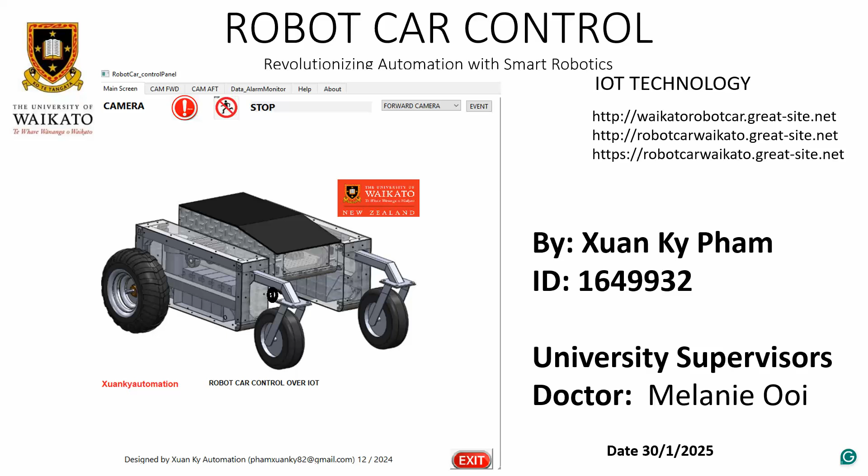Introduction: what is IoT in robotics? The Internet of Things enables devices to connect, communicate, and make decisions based on data. In robotics, IoT allows real-time data exchange, remote control, and automation.

Robot cars are used for various applications like delivery systems, self-driving cars, or smart logistics. The objective of my presentation today is to explain how IoT enhances robotic vehicles and discuss architectures, operation procedures, tools for development, challenges, and future improvements for robot cars.

Overview of robot cars: the self-driving robot car uses IoT technology for remote control, navigation, and control systems. Main features of robot cars include obstacle detection, GPS navigation, and remote control via smartphones or website.

We also have communication devices on another side. Secondly, the main system controllers are Raspberry Pi and ESP32.

Raspberry Pi plays the role of a web server or MQTT broker only. But ESP32 communicates directly to devices and equipment to control the car.

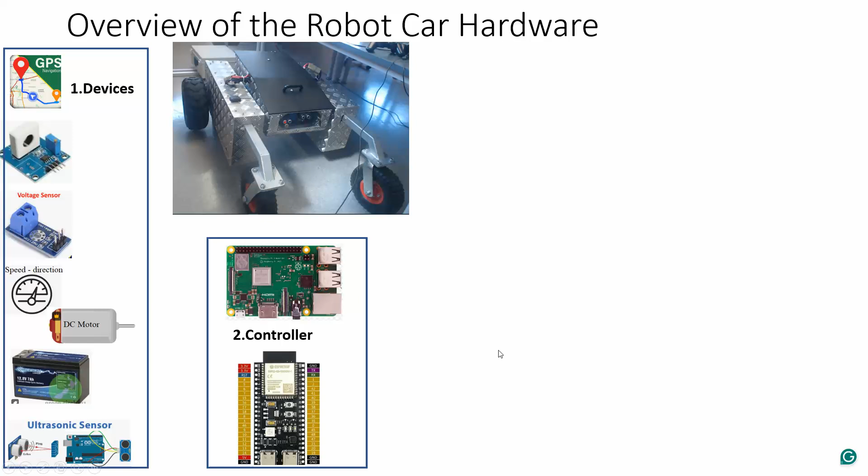Third, communications, and finally HMIs for human-machine interface. So people can activate from a human interface and control using communications, controlling the ESP to control the robot.

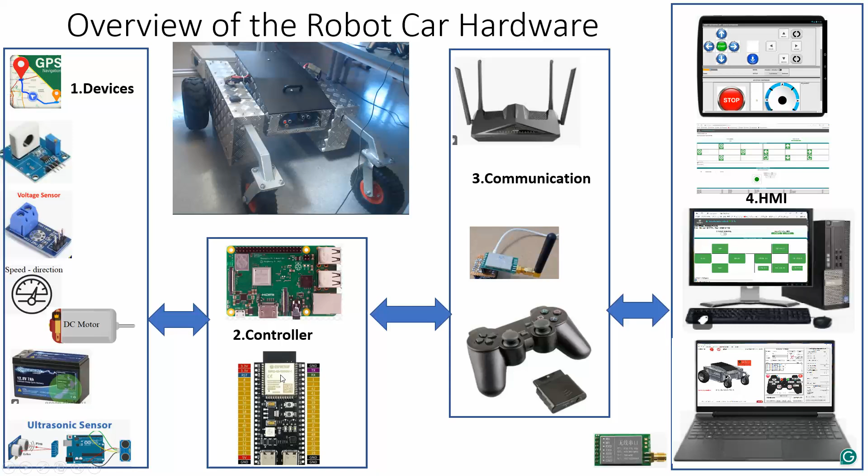Core technologies: MQTT using over Wi-Fi, LoRa, and remote control PS2. Microcontrollers include Raspberry Pi and ESP32, motor drivers, sensors, and power source lithium batteries.

System architecture and block diagrams. The robot car includes 10 batteries for controlling motors and 3 batteries used for the control system.

Power is supplied for Raspberry Pi and other devices. Each battery has 12 volts and 7 ampere-hours of power. The motor driver gets voltage directly from

the motor batteries, including 10 batteries totaling 70 ampere-hours.

In the 3D system architecture block diagram, we see the 10 batteries for motors here with a voltage sensor, and 3 batteries for the control side. ESP32 and Raspberry Pi act as the center control unit, and another human interface is used for remote control by Wi-Fi, MQTT, and WebSocket.

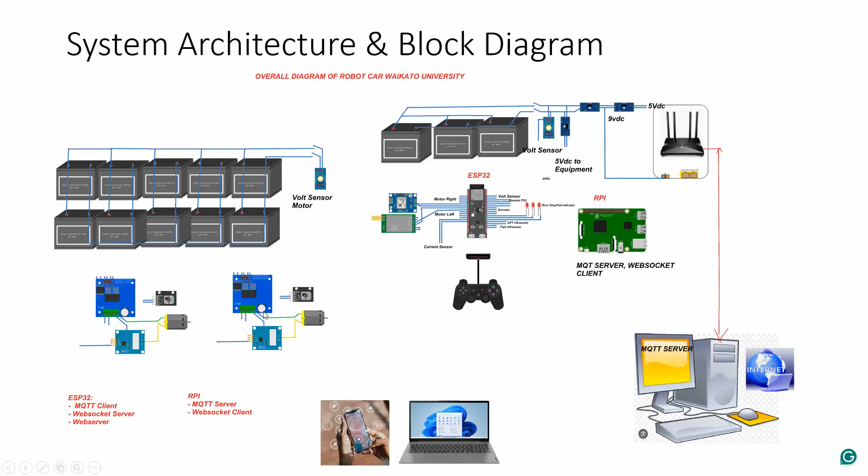Motor controller. Now we discuss communication flow - communication flow in a local area network.

Raspberry Pi plays the role of web server and local MQTT broker. ESP32 is the center control unit to control the car, managing devices like motors, sensors, and anything else from the robot.

ESP32 has a web server inside: MQTT client, WebSocket server, web server, and main controller for the robot car.

In the communication flow, a PS2 remote controls the car directly without Wi-Fi connection or MQTT connection - it's controlled directly. The web server from ESP32 is accessed by HTTP port 80 and directly controls the car.

Another thing: MQTT broker in Raspberry Pi. Data from Raspberry Pi and ESP32 will transfer to the broker, and other devices like MQTT clients can access the broker to send and receive data.

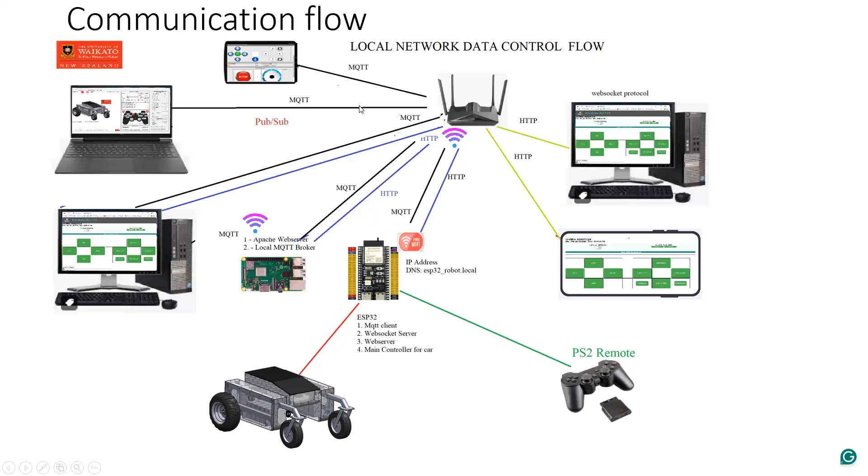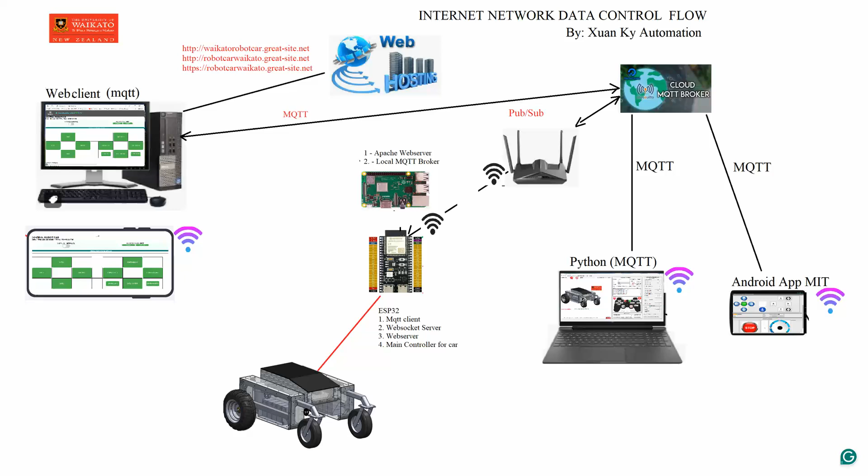Software implementation for robot cars: we use Arduino IDE to program for ESP32. In Arduino IDE, we separate each function at each pace so that we can troubleshoot easily.

Secondly, we use Visual Code with HTML for programming HTML, JavaScript for the web page for ESP32 and web page for the internet on computers. Thus, we use Python with PyQt6 to program the interface for the robot car. And finally, we use MIT application for programming the Android application for robot cars.

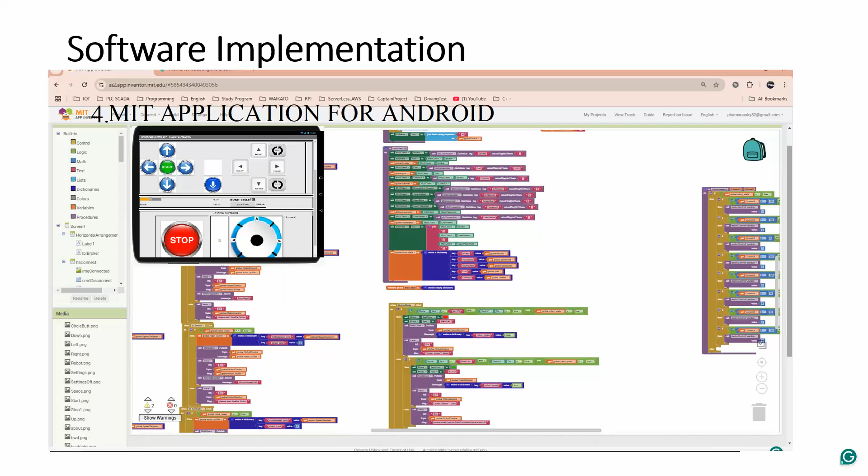Safety protection is one of the most critical parts of the robot car design. To prevent any accident during use, we install some safety devices, like current sensor monitoring on RobotCar to stop the motor whenever current exceeds the motor ratings after 30 seconds. Motor fuses are also installed to prevent overcurrent.

Secondly, a voltage sensor is also installed to stop the motor whenever voltage drops below the limit setting, about 70% of voltage rating, to prevent battery over-discharge.

The front and rear of the car are installed with ultrasonic distance sensors to stop the car at the safety distance setting. A LiDAR detects the range forward and rear distance from car to objects. If the distance is lower than the distance setting, the car will stop. I'll show it later.

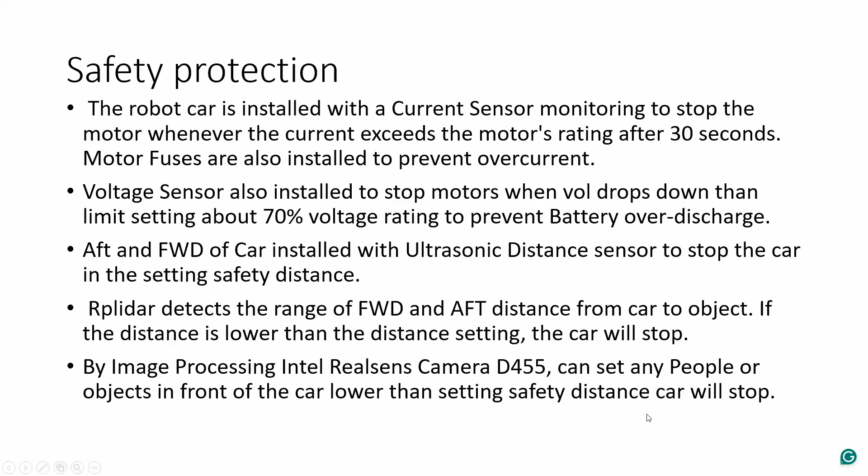And by image processing, the Intel RealSense camera D455 can detect if any people or other objects in front of the car are lower than the setting safety distance, the car will stop. Let's see from here.

The car stops by distance sensor or voltage/motor sensor after 30 seconds. In the program, we already wrote safety protection for voltage and current, and safety distance ultrasonic sensors. We also enabled the aft sensor and forward sensor ultrasonic sensors for stopping the car.

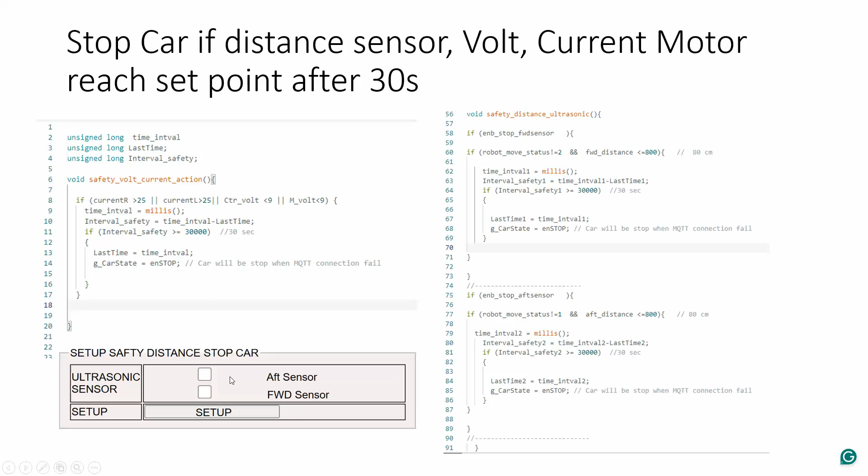Safety device LiDAR detects forward and aft if any object obstructs the car within the safety distance setting, so it will stop the car immediately to prevent accident. In front of and aft of the car, ultrasonic sensors are already installed to detect any object in the safety range, which will stop the car.

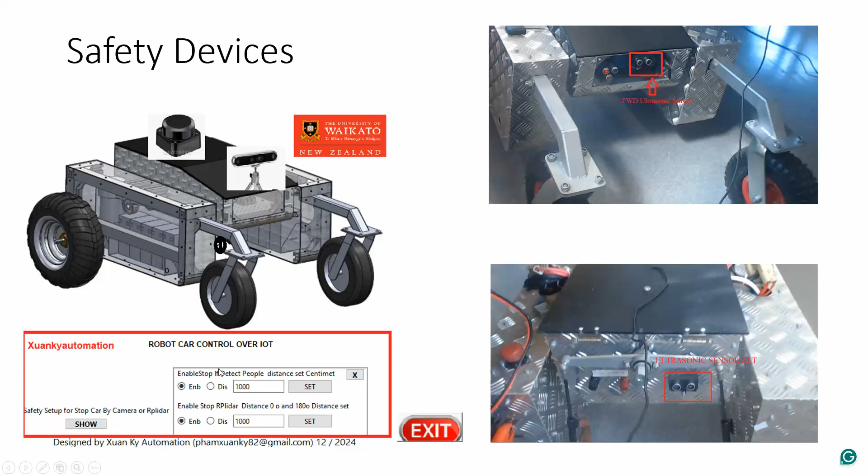Now we'll show some videos of methods for controlling robot cars. The first one is controlling the robot car by remote PS2. The remote PS2 is designed to control the car directly. If any error occurs from the network, like communication protocol, no network, no Wi-Fi, or no router, the remote controller will control the car directly to operate it.

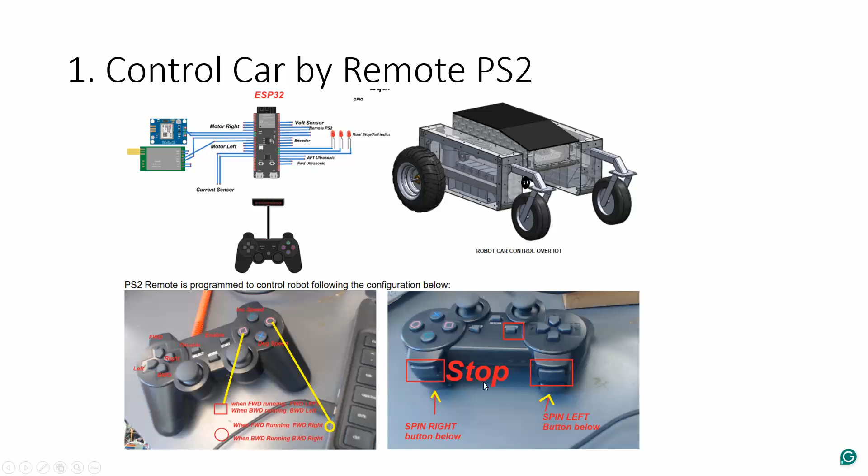Let's watch a short video of controlling the robot car over remote PS2.

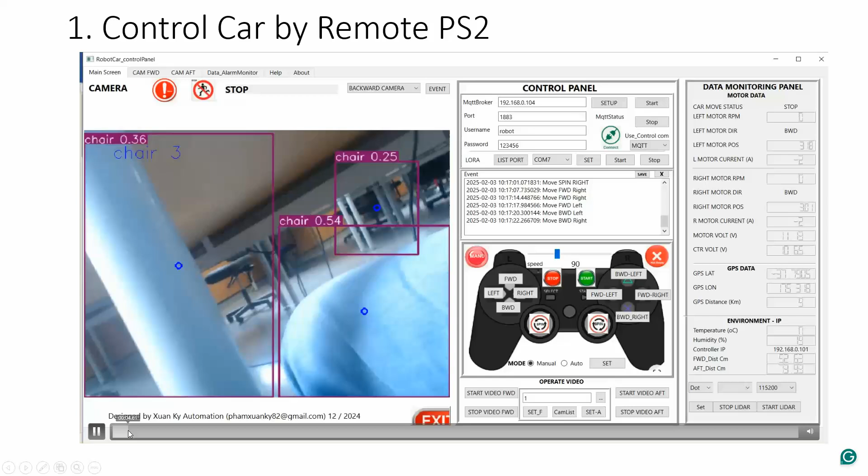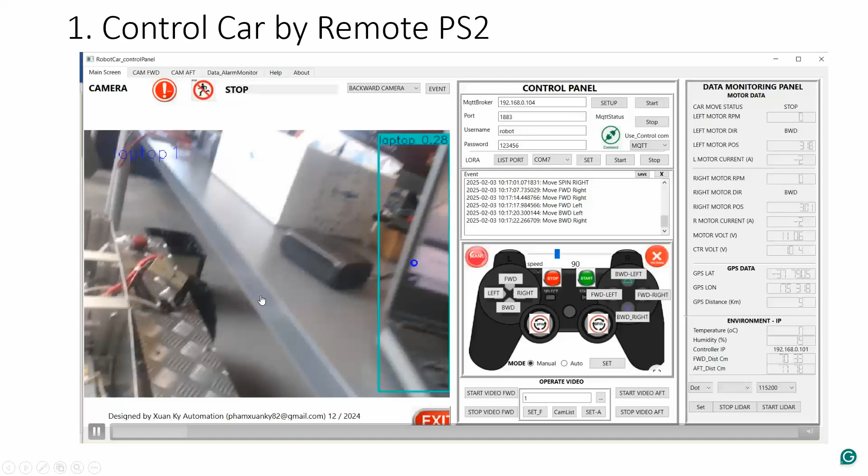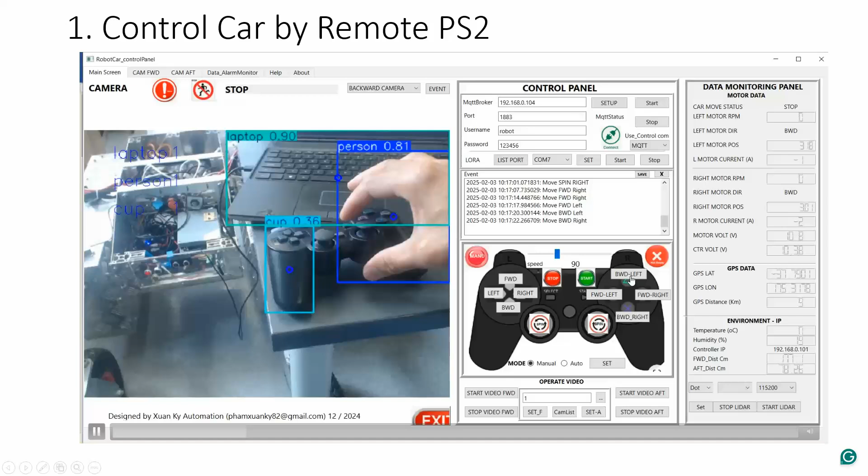In front of you is the remote PS2 and the receiver is here. We can operate this. When we press the buttons to enable the robot, the indicator lights will receive signal on the Python program. See the indicator light - the Python program is only monitoring the car operations.

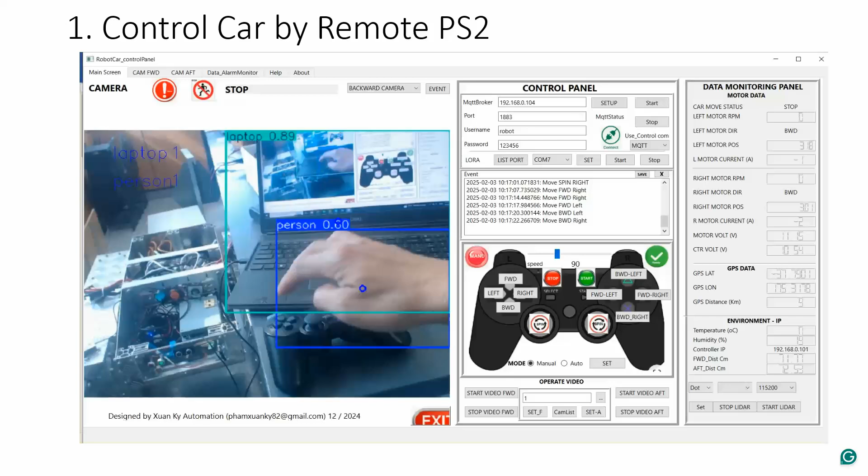It's not related to the PS2 remote. The PS2 remote works independently. You can start it forward, change speed, move left, right, or turn using the remote PS2. Change speed, increase speed.

Data from the motor can be monitored from the website or from the Python program.

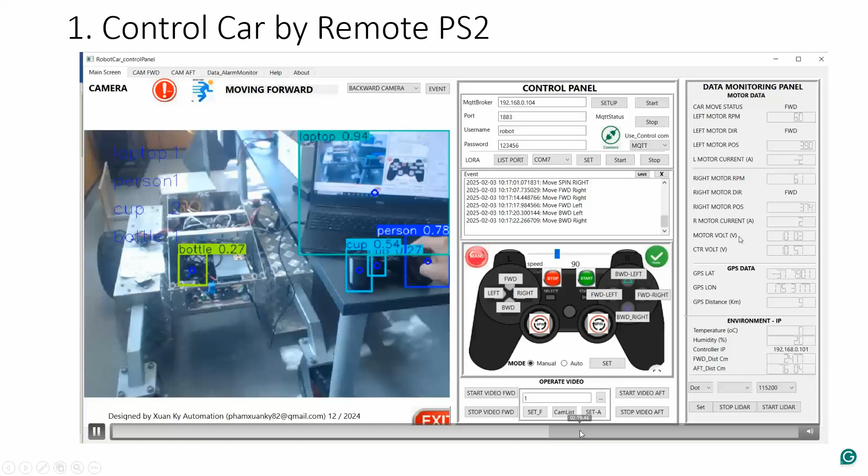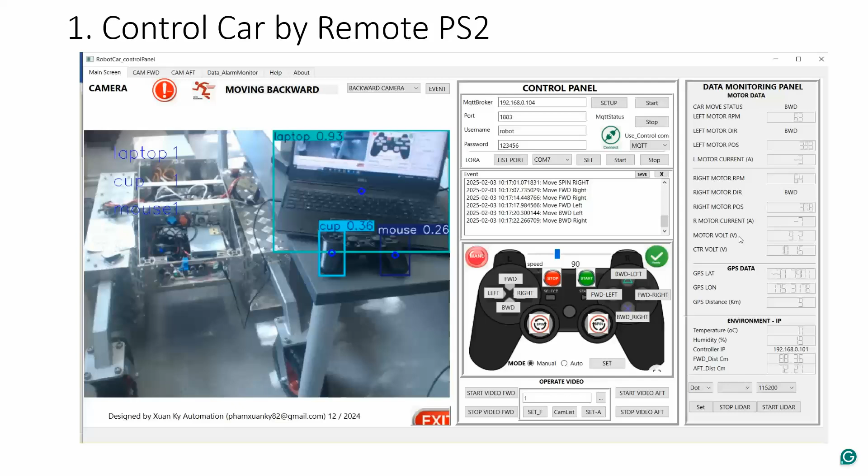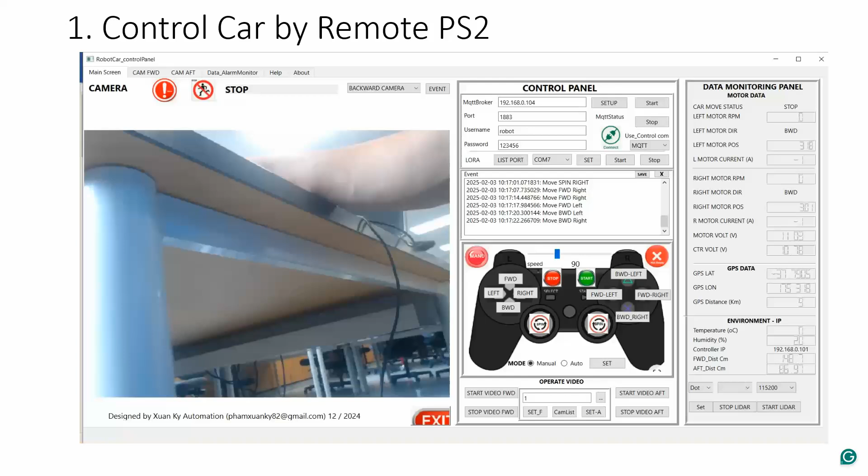Now we've finished controlling the robot car by remote PS2. Let's go to another section: the video for controlling the robot car over the web server directly on the ESP32.

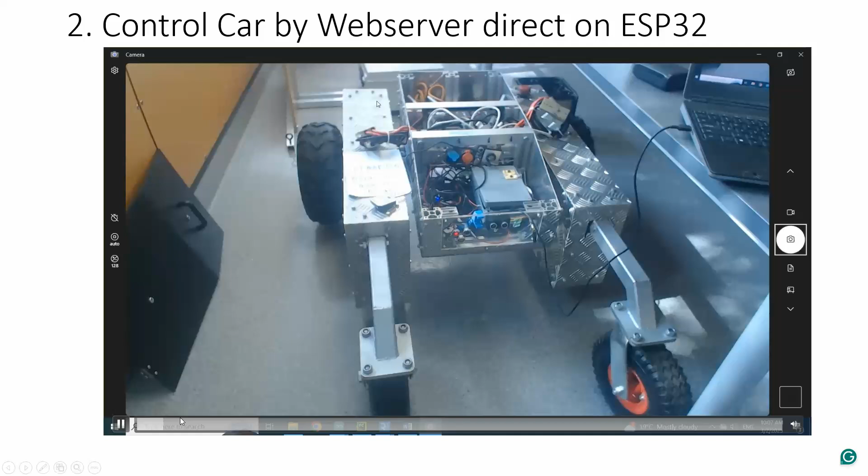This is the robot car. We will try to operate the robot car website. In front of the robot car we have the safety devices and indicator light.

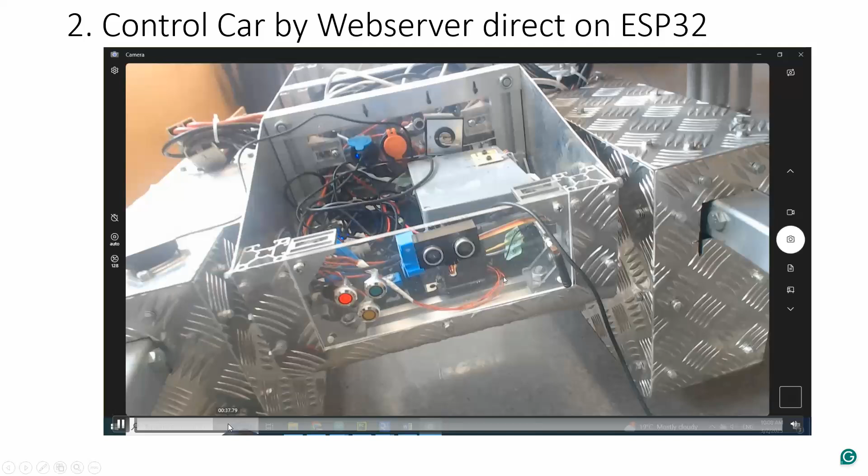Now this is the web server running directly on the ESP32.

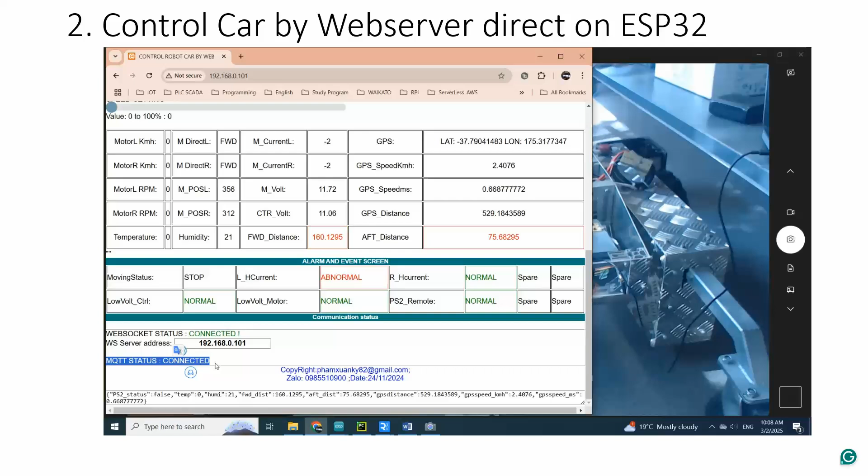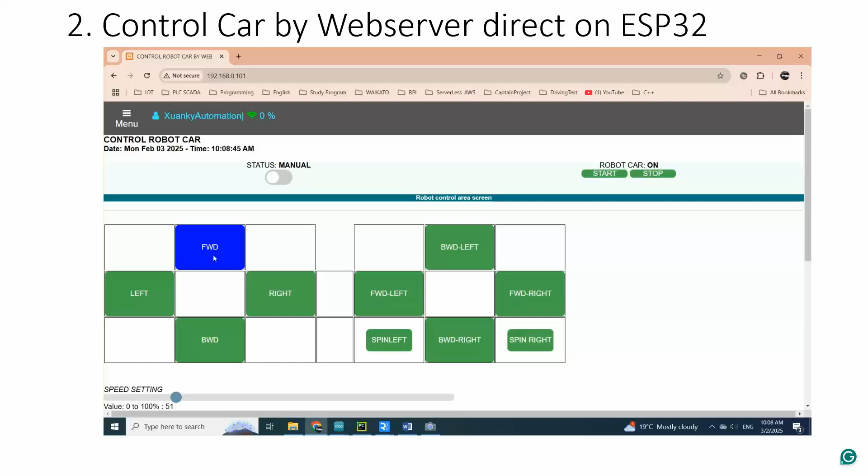Data will send and receive to the web page. Enable the robot car to start, and now we can change the speed and start the robot. Now the robot car is moving.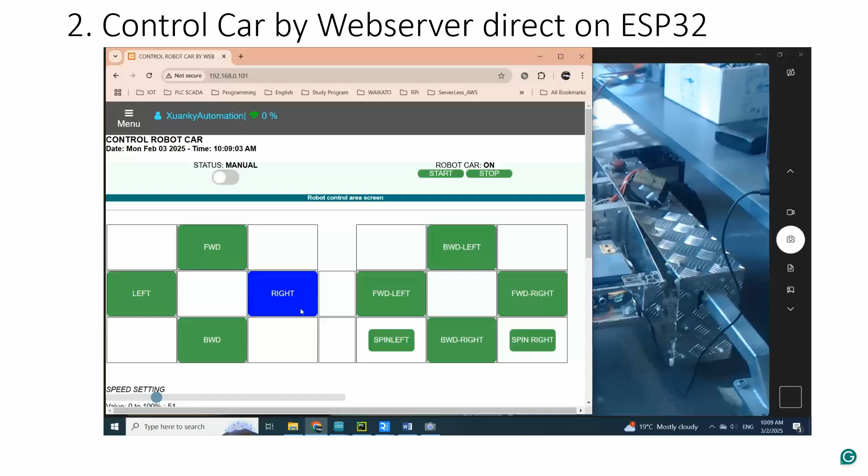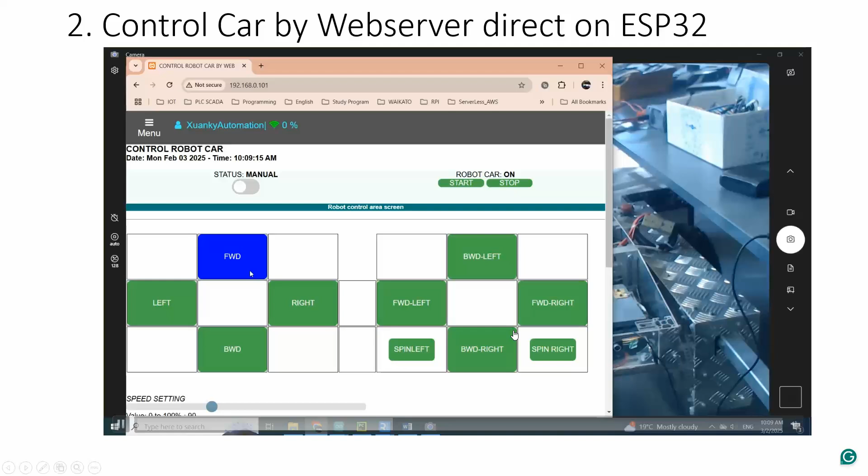Normally, the ESP32 is already programmed with a DNS server, so we don't need to remember the IP address. Okay, let's go to another section.

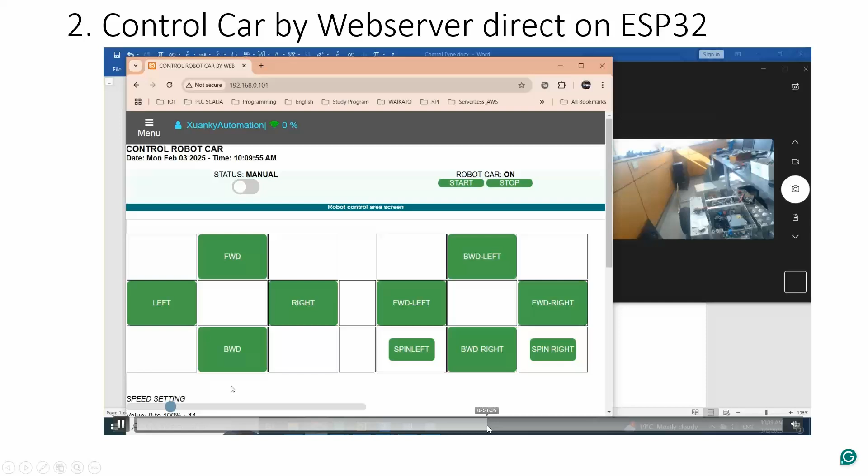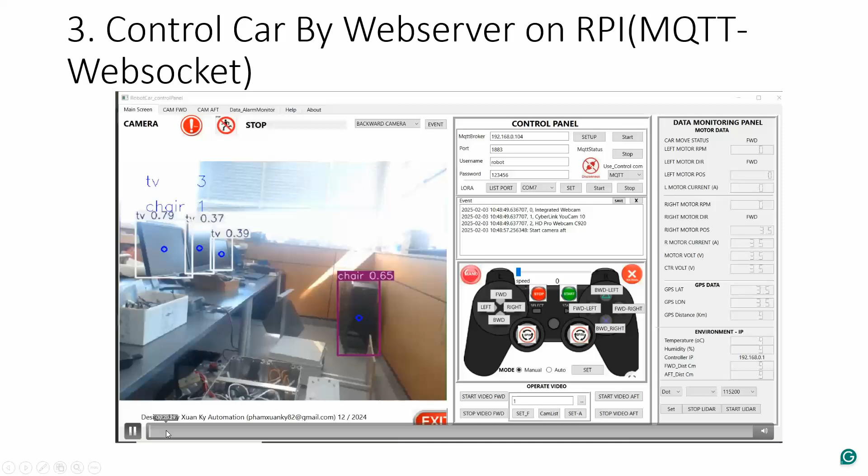Now we control the robot car by web server on Raspberry Pi. The Raspberry Pi is installed in the RobotCar to play a role as web server with MQTT connection and WebSocket communication. So let's go open the website on Raspberry Pi to control the RobotCar over the web server on Raspberry Pi. Raspberry Pi is here.

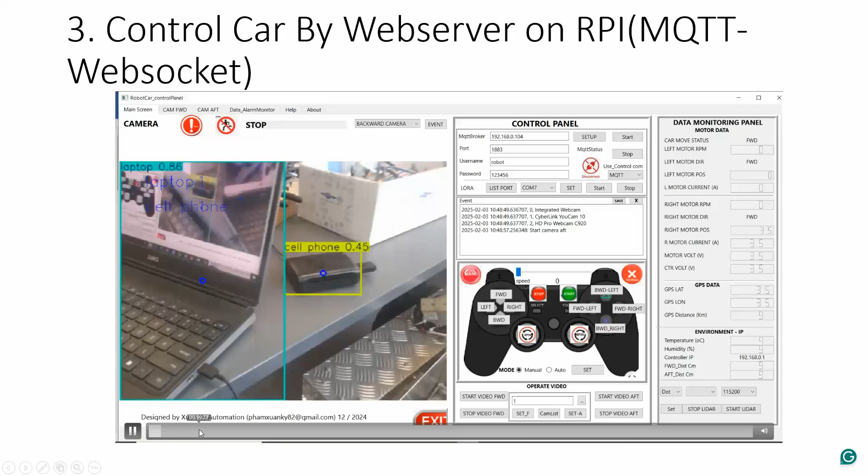So what we do, we need to type MQTT. Now we set up the IP address for the MQTT broker. The broker is on Raspberry Pi. I already set the static IP address for this Raspberry Pi.

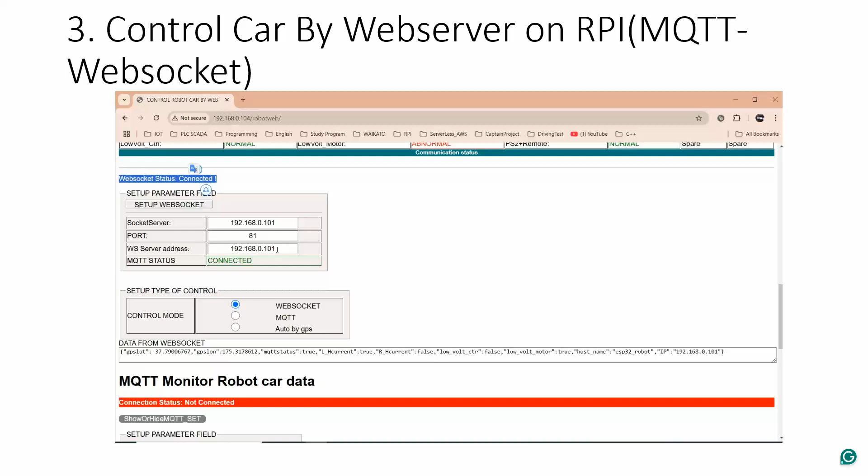See, we open the website at the IP address of the Raspberry Pi and connect to the IP address of the WebSocket, and data will send to the web server, RobotCar, from here, and we can control the robot directly from the website.

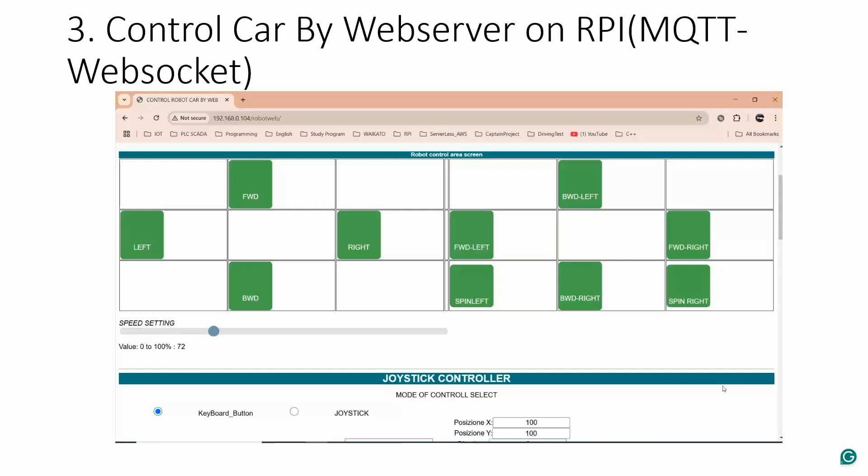We need to change the speed. Forward. Let me check because the robot is now disconnected. Charging. Okay, now we are doing control. Let's go to another section.

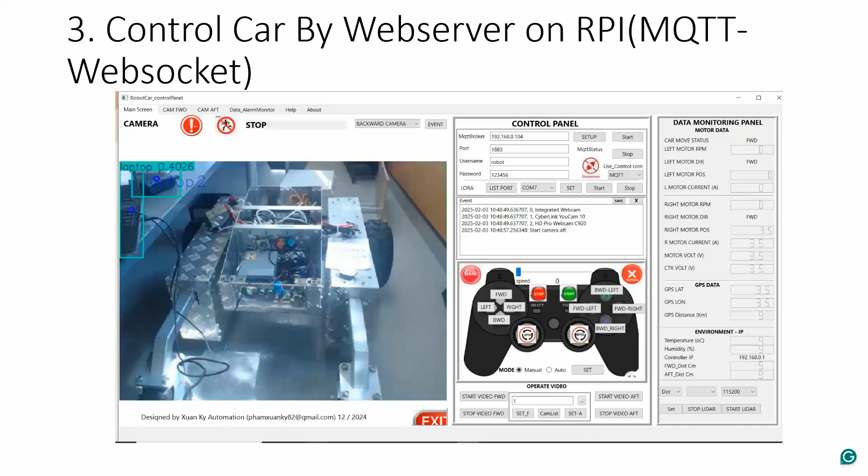Web server: control the car by web server on the internet with the MQTT protocol.

On the internet, we need to connect your Wi-Fi to the internet, open a web browser and type robotcarwaikato.great-site.net, or another website is waikatorobotcar.great-site.net. We can open a website on the internet and log in.

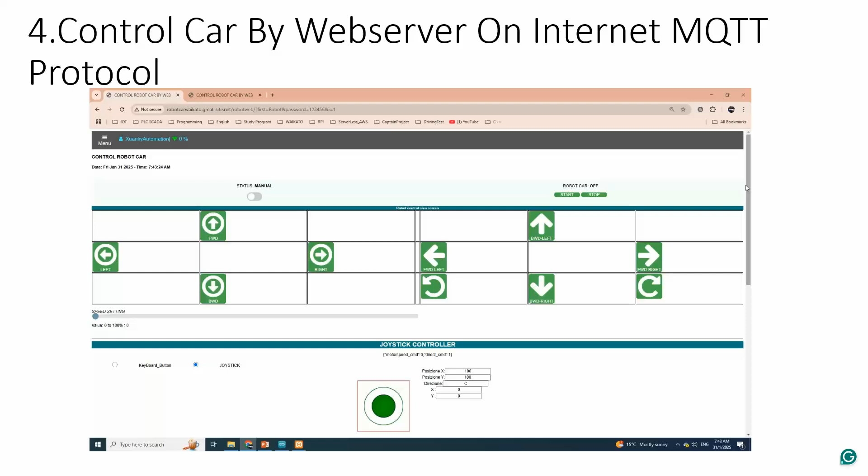Connect the website to the MQTT broker, and the ESP32 configuration publishes and subscribes data to the same broker as this website, so that we can operate the robot on the internet.

Actually, we can download the Android application program from the internet. I already uploaded it to the website, so just scan the QR code to download the Android application and install it for robot operation.

Let's go fast from here. Okay, for the internet MQTT protocol operations, we have one page for automatic control by path planning.

But right now, the communication for sending data from the internet to the ESP32 is already done, but the control algorithm is not yet implemented.

Okay, let's go to another section. Number 5: control the RobotCar by Android application with MQTT protocol. I already made one Android application for controlling the RobotCar with an interface like this.

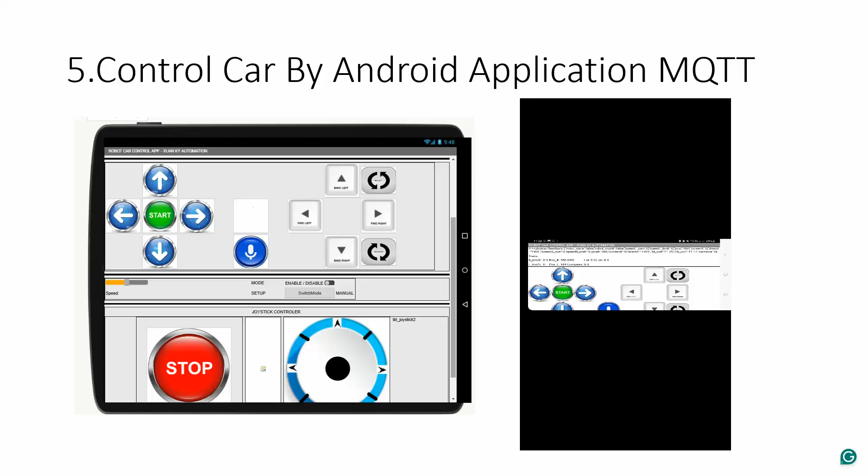You can see, but the video is changing direction, it's very small and hard to see. Stop, so the robot car stops. Start the robot car, yeah.

Move forward. Move backward.

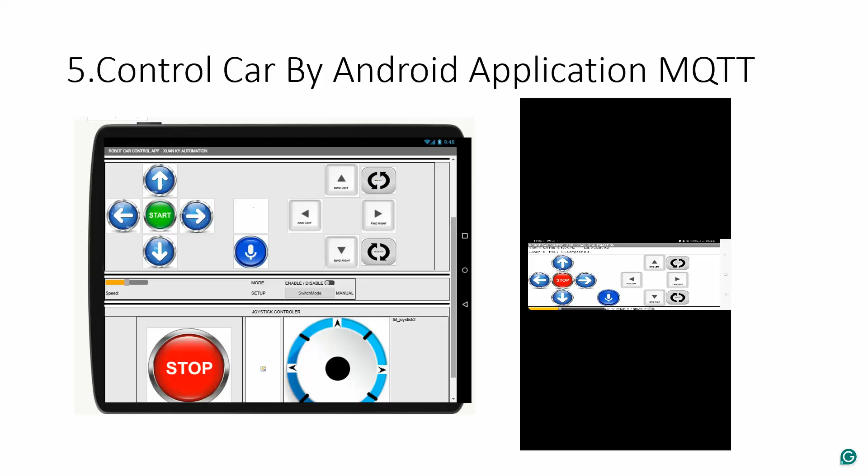There are many ways to control the RobotCar by Python program on PCs: with MQTT protocol, LoRa communication protocol, and by image recognition using YOLO 11. There are 3 ways to control by Python. So by MQTT, let's start the RobotCar.

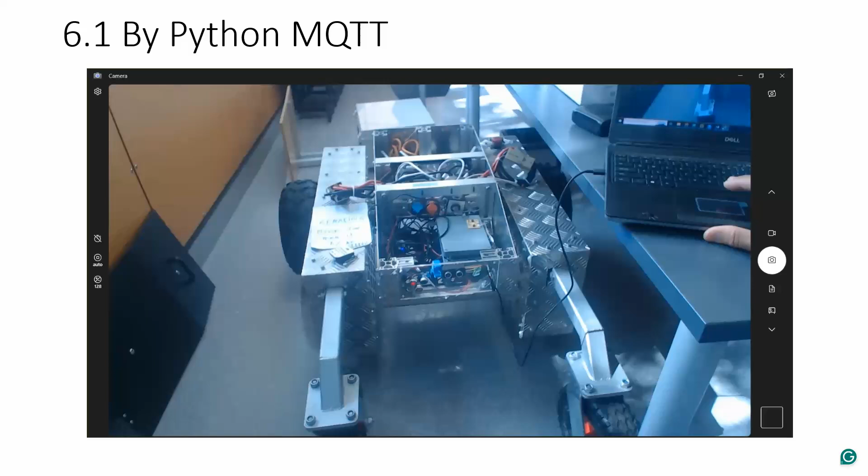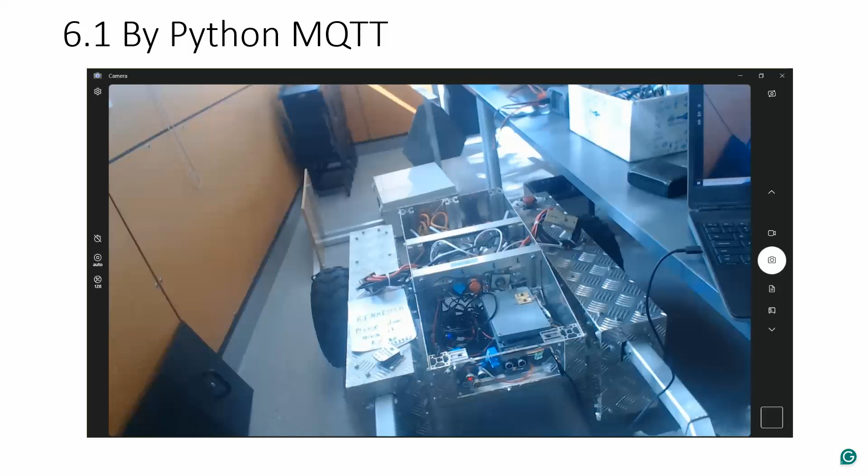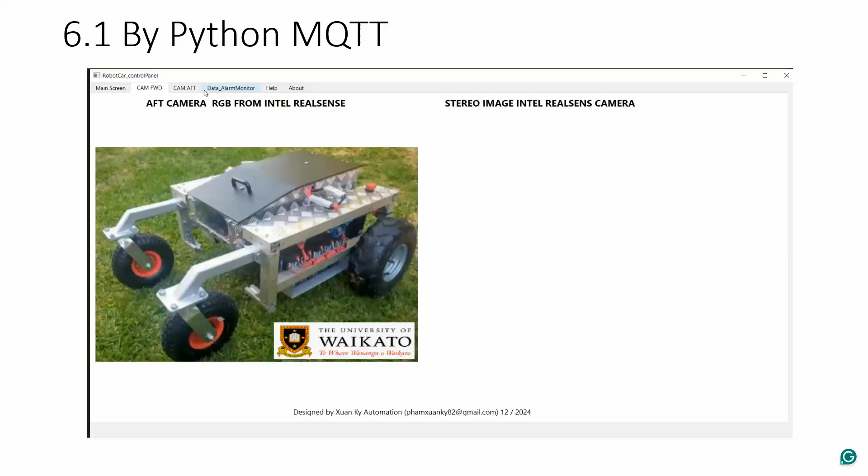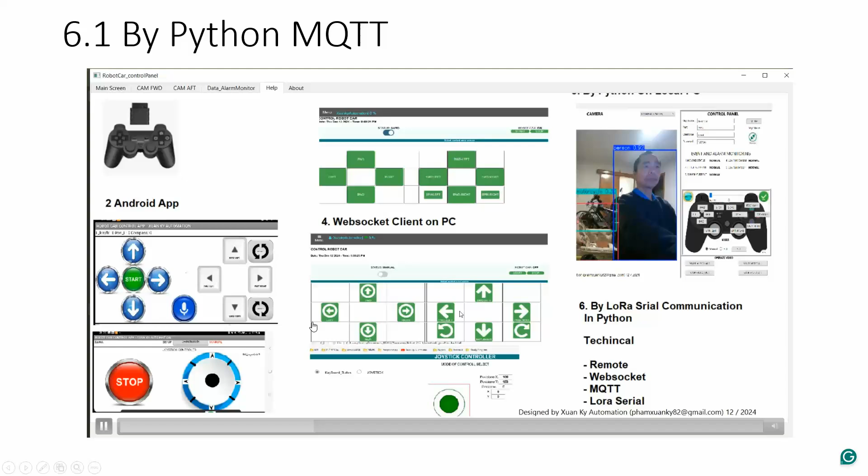We already mentioned there are many ways to control RobotCars. Actually, it's 9 ways to control RobotCars, not 6 ways.

Brokers, MQTT: we set up the MQTT broker and click start. Connect. Now MQTT is already connected. ESP32 connects to MQTT, and the Python program also connects to MQTT, so data from the ESP32 on the RobotCar will be sent to the Python program.

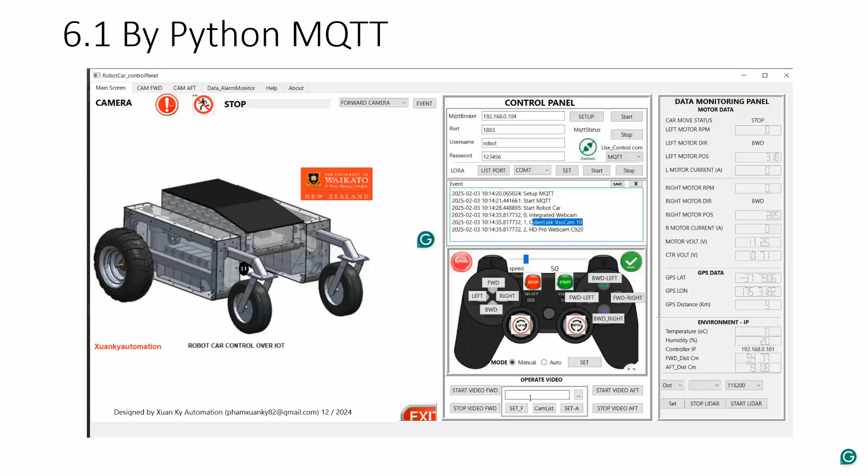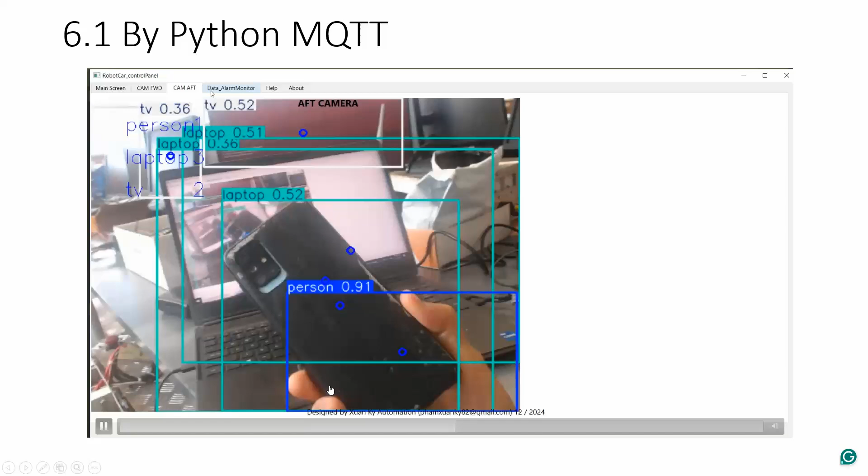I open the app camera, you can see. Okay, now we try to start the robot. See, on the Python program I already made an interface for controlling the robot, so we just press the buttons and the car will move.

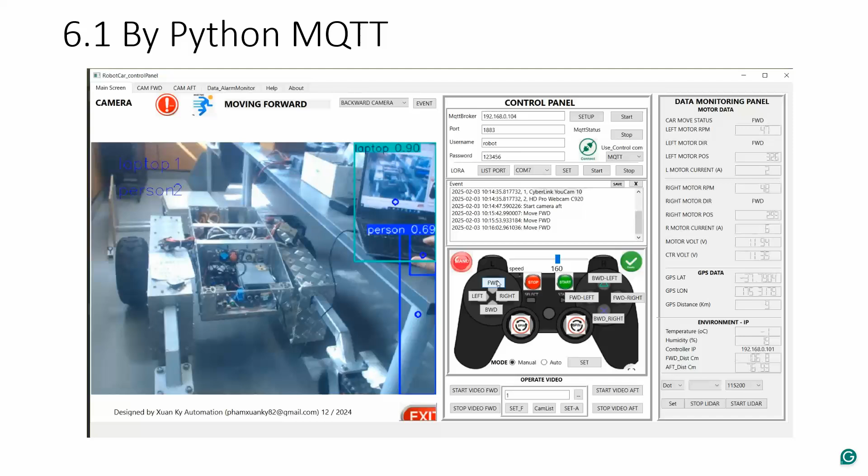Okay, let's go to the next section. 6.2, control the RobotCar using LoRa communications.

LoRa communication is used in cases where there is no connection between remote and robot, because the distance is too far. LoRa has long range communication, so it can send and receive signals from the robot.

Data from LoRa, receiving data from the robot, testing whether data is coming through LoRa or not. Close the terminal from here. I close this and open the Python program.

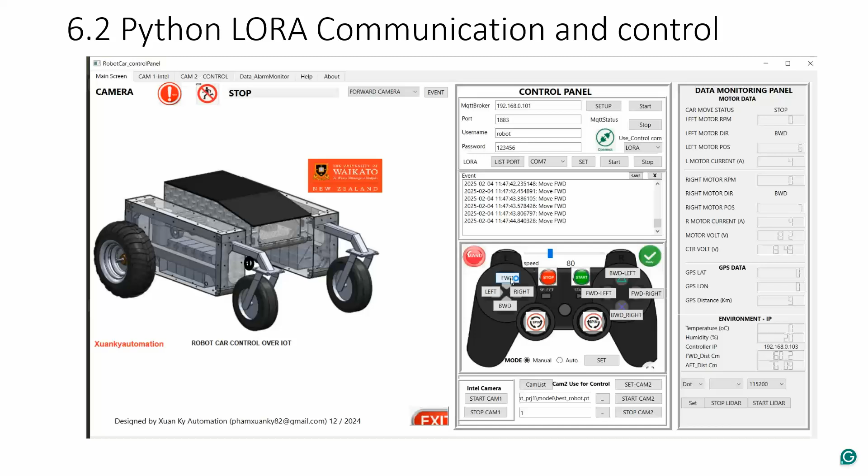Okay, we go to the next section. Python: we control the robot car by Python image processing. Open the Python application. Labeling view camera number 1. What we do is set up the robot, set up, start the camera, set up the camera for control.

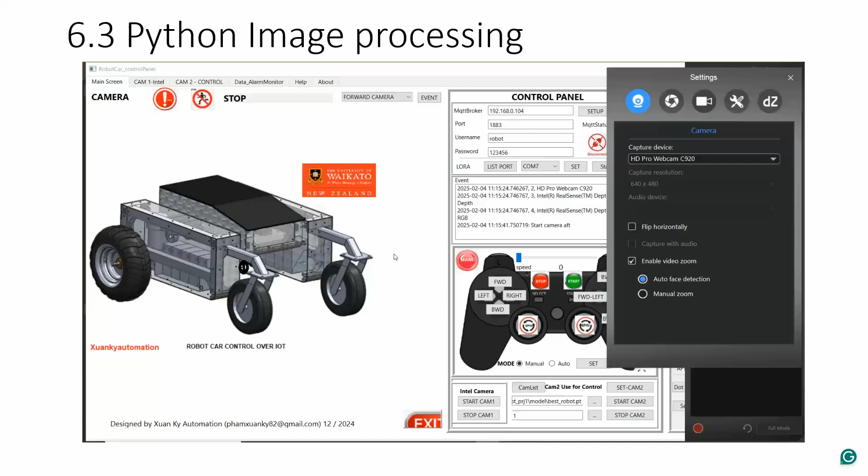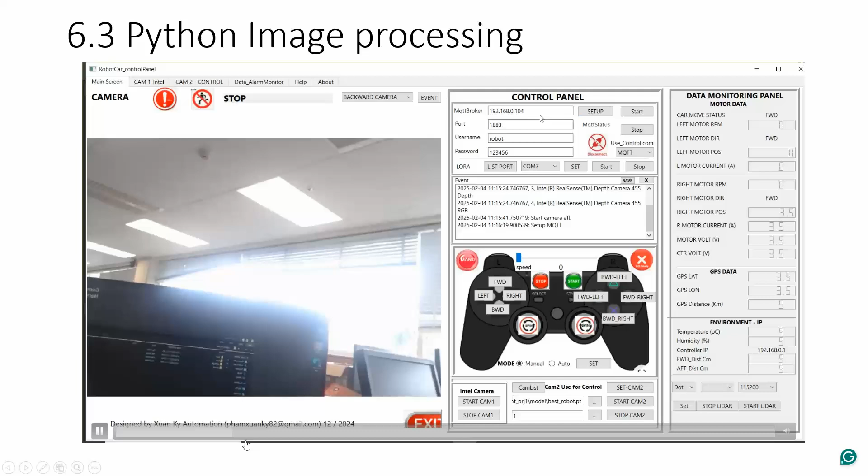We move fast. Okay, this is the image in front of you. When the camera stays on this side, it will control the motor moving forward.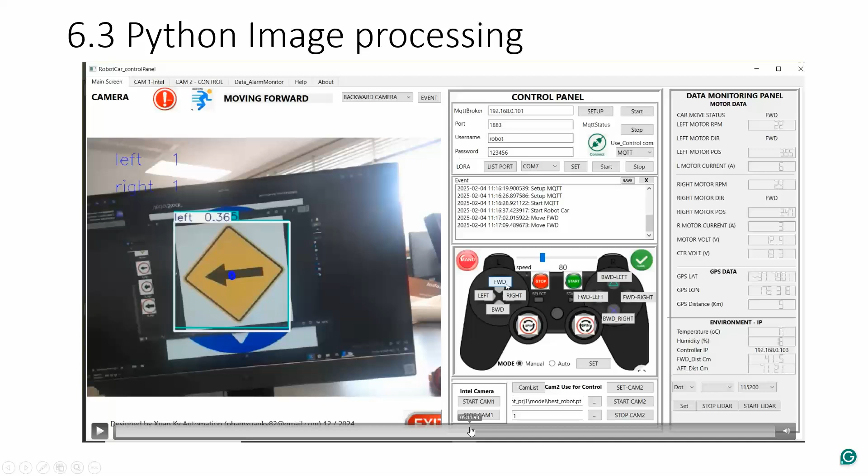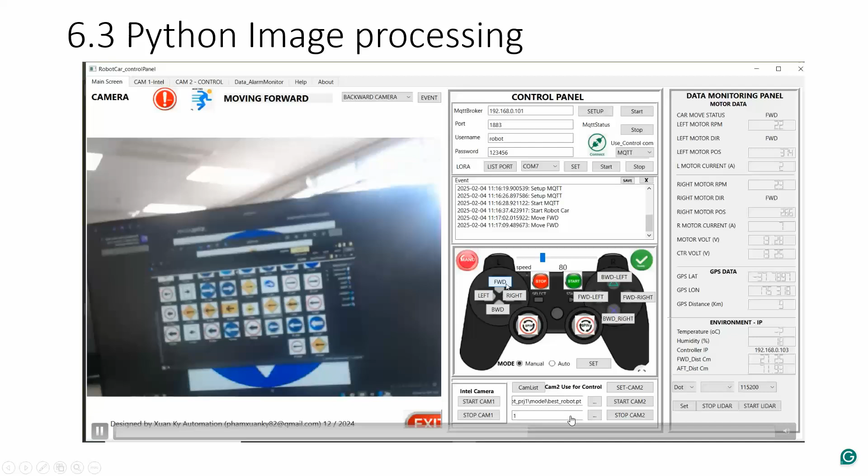Okay, right now we can control speed. Control depends on the data, and we change speed for the motor.

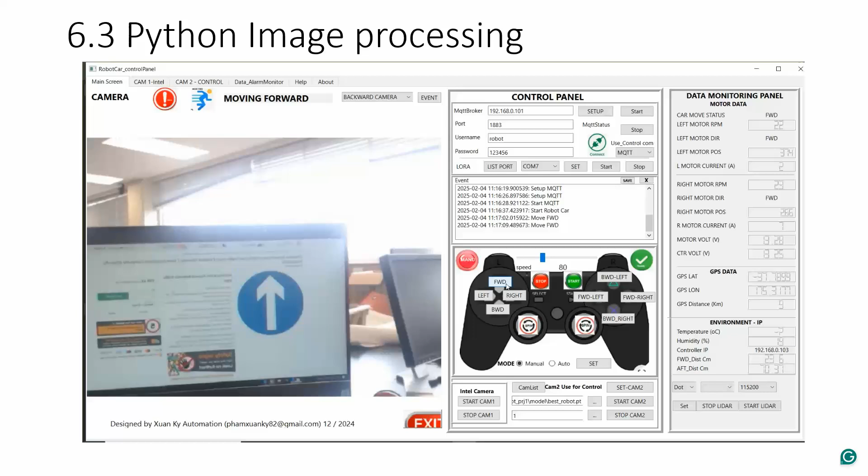Okay, we finished the Python image processing. Let's go to another section. This is just an idea, I haven't finished the control program yet. This is automatic control by path planning, GPS.

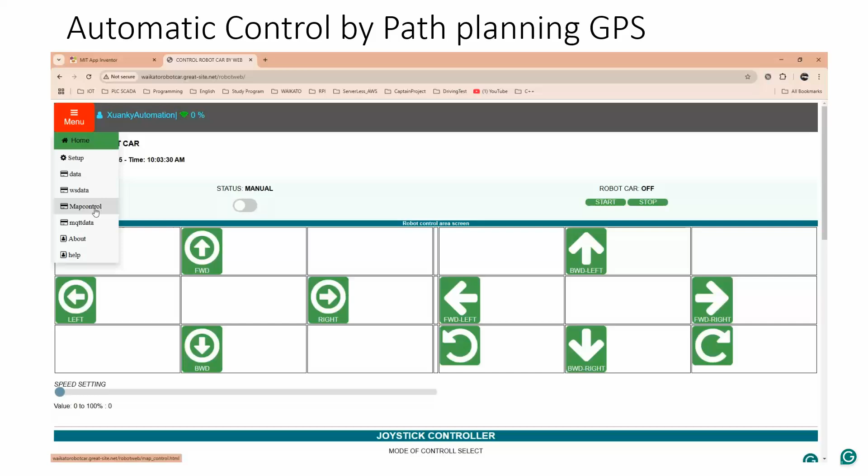The idea is to control the car, making the program for this. We open WaikatoRobotCar.great-site.net, go to map and control. It is a website for controlling robots.

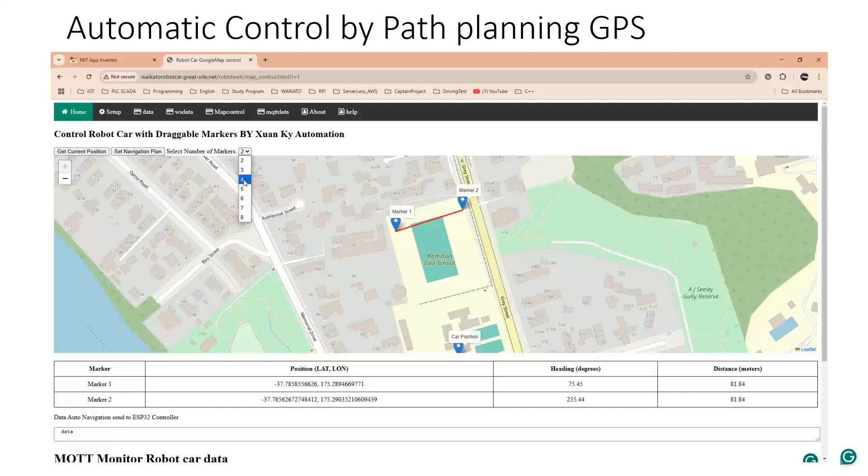In the map control, it is a map for path planning for robot operation. In the map we can set up the distance and direction the car will reach, for path planning of robot cars. For example, I need to set up 4 points. The car will move from marker 1 to marker 4.

Marker 1, and to number 2, and marker 3, then go to marker 4 and come back through the markers. So the car position has a heading, and for each position we have the heading and distance.

For example, from marker 1 to marker 2, the distance is 81 meters and the heading is 75.45 degrees. This is sent from the website to ESP32. Car position is set here.

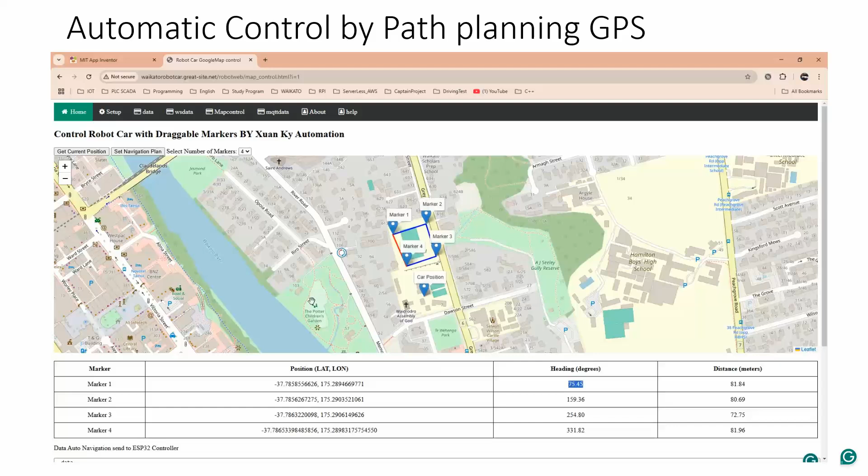So what we do now is just set up the path planning for the cars, going down, and we have a button to set the navigation plan.

When we set the navigation plan, the navigation plan data is sent to ESP32 via MQTT connection. This data is sent to ESP32. Let me open the robot firmware.

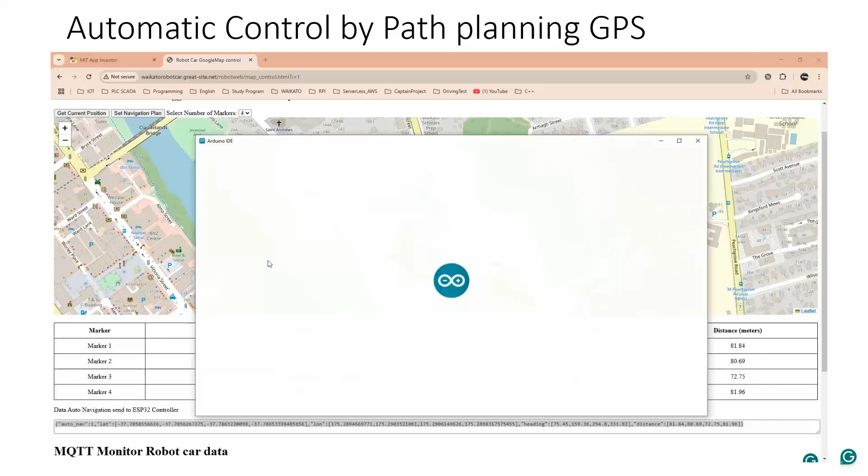In Arduino IDE, this is the program I opened for ESP32. The path planning data is already set to be read from the internet website. The data is opened by the website and sent by MQTT to ESP32, which makes a plan to control the car moving, receiving data and direction that we already set.

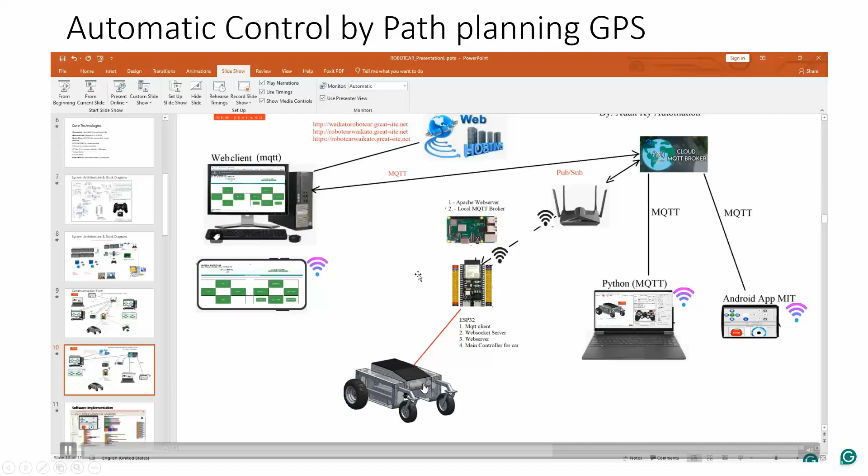Following the path planning, for example, when we send the signal from the website to the robot, it will remember from here. Let's see from here. When we send the signal from the website, ESP32 will check, coming to this side.

It checks if the signal from the website is for GPS path planning or not. If yes, it extracts data from the variable, and the robot checks if the data follows the path planning, then operates the robot automatically.

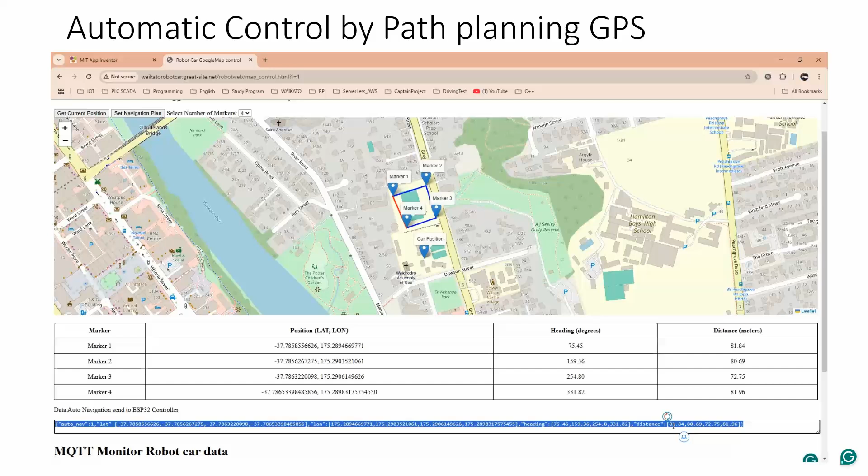From here, the data for heading, GPS position, and distance will be set, and the robot will move and operate automatically.

The problem I am facing is how to write the automatic program to control the car. One of the most important things for ESP32 is how to update the program without connecting a hardware cable. In this program, the ESP32 robot controller is set up to update firmware over Wi-Fi without any physical connection to the controller.

So to update the firmware on the ESP32 controller, just follow the short video below. Updating the program for ESP32 - how to update the firmware. You need to wait a minute.

I open this side. We need the controller to update. The first time, we open Arduino IDE to change some things. This is the project for the robot. After changing some things, we export.

Let me start again. Open the Arduino IDE program, this is the project for the robot. Main program, from here, global variables - this is the main program of ESP32.

Let's see how to export the project data to a binary file manager. Global variables: temperature, humidity, robot goals, and remote. First, let's compare the RobotCar original program with the Python RobotCar.

Go to another section: how to update or change the web page for ESP32 or Raspberry Pi. Because ESP32 RobotCar controller is using HTML JavaScript, we need to update and change something. We'll follow the video.

Here, not only the web page, robot final here. The web page of the robot is normally in the data folder. You can change the data, edit the program. If you want to change something here, edit the index file, just change it and save it. Normally, you can edit the web page from here, and then upload it to ESP32.

However, in some cases, when you edit to ESP, go to the FS File Manager. FS Flat is for the manager of the ESP32, files inside ESP32. So open directories, we can see the files of the web page here.

In File Manager, for example, if you want to update the index file, if you want to upload the index file, on this page you want to change some tag or something here. Index is the main page. Open the file manager from here.

If you don't have the file, just download this file. For example, you download this file and you can keep it. You can download the file from ESP32 to your computer's index folder, for example like this. Download index file, and then do some changes in the index file.

Challenges and limitations: the limitation is if we stay very far from Wi-Fi, the communication will affect the controlling over website or mobile network, affecting real-time controls.

Sensor accuracy, like GPS or ultrasonic sensors, noise can impact the robot performance. So sometimes we need to override the ultrasonic sensor because it is sometimes working unstable, it will stop the robot unexpectedly.

The robot car battery life, IoT components consume more power, requiring efficient energy management. More power means more weight, because more batteries increase the weight of the robot car, and that affects the load.

Environmental factors like sunlight interference, reflectance, or road interference affect the cameras when we use the camera. One more important factor is the weight of the car, including batteries, also affects the power duration.

Also, if we use image processing to control cars, to make the image processing more reliable, we need to have more datasets with many angles of pictures to be trained.

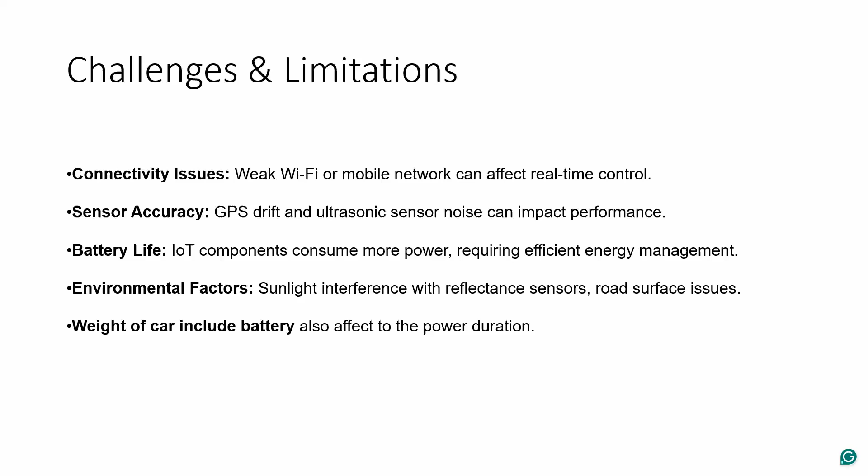Future improvements and applications: enhanced program of automatic control following navigation plans by GPS, improve dataset quality to control over traffic signs, or PID control for motor speed regulation, or apply MQTT server.

MySQL server to store data of robot cars. Actually, it's not very hard to improve this section. MySQL server can be implemented in the Raspberry Pi web server so we can store data of robot cars.

Conclusions: IoT technology allows real-time control and monitoring of robot cars. The combination of sensors, microcontrollers, and cloud connectivity enables very autonomous operations. Future improvements like AI or 5G data transfer, which is very fast, will make this system more powerful. IoT-based robots will shape the future of automation.